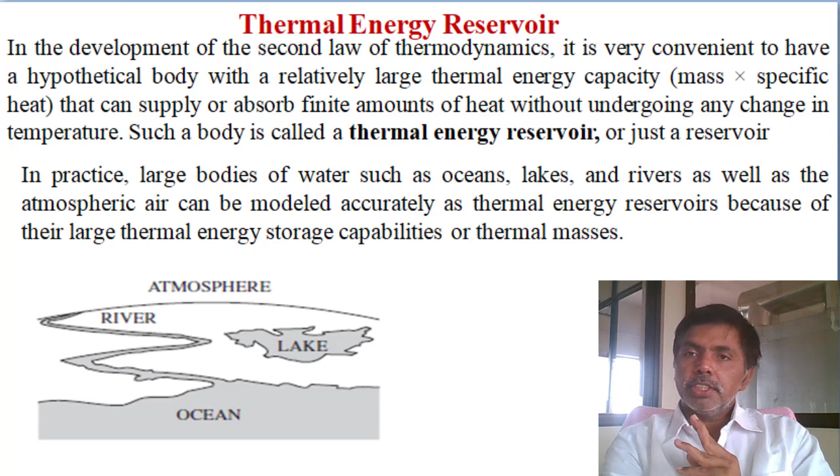So, how will it fit? What is the necessity? It is for achievement of external reversibility. This hypothetical assumption is for achievement of external reversibility and simplification of the problem only, no doubt at all. Any examples we can discuss? The first example: we are dumping so much heat, household heat, residential building heat in winter, but the ambient temperature is not changing. So the ambient condition we can call a reservoir.

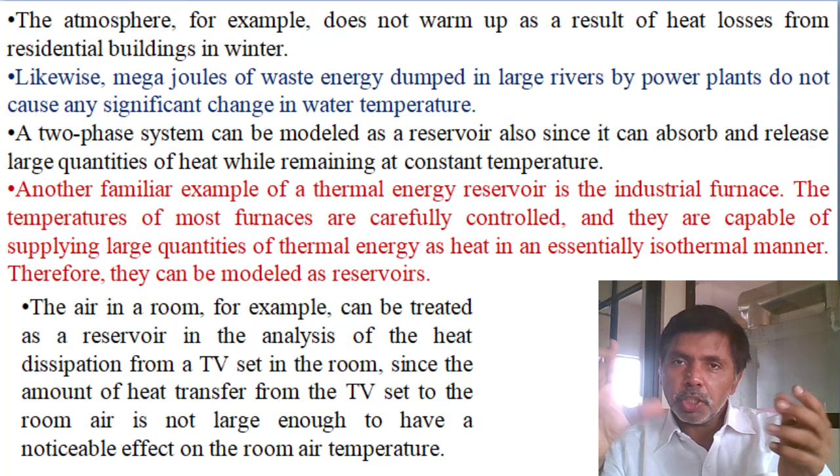Or waste energy from the industries, because it is dumped to the rivers. In condensers, cooling towers are used. There also the temperature is not changing. Or when you switch on the TV, electronic goods, if you move to the nearer area, you feel hot. But overall, the room ambient temperature is not increased by the TV. So continuously we are dumping waste energy to the atmosphere, and the atmosphere temperature is not changing. So the atmosphere we call a thermal energy reservoir. We continuously reject heat, but the temperature is not changing.

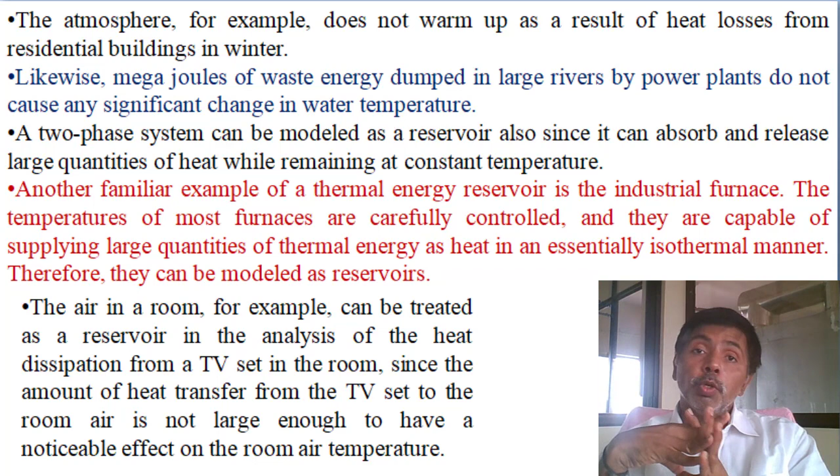And second, in a positive way, the furnace. For different purposes we are using furnaces. In all furnaces we maintain a constant temperature. It may be 900 degrees, 1000 degrees, whatever it may be. Constant temperature continuously. It is also called a reservoir. So I have given two examples: one is high temperature, the second one is low temperature. Reservoir means an infinite amount of heat quantity. Whenever we are adding or removing, it is not changing. It's called a thermal energy reservoir.

Source means a reservoir continuously giving heat, or from which we continuously extract heat. Source: the furnace I mentioned. Or solar energy: continuously at 5500 degrees Kelvin it is rejecting heat, continuously giving that high temperature to the earth as electromagnetic radiation. So we can take solar as an example also; at constant temperature it is continuously given.

Coming to the sink: it means continuously absorbing heat, or we are continuously rejecting heat to the reservoir and the temperature is not changing; it's called a sink. Best examples are the atmosphere, rivers, sea. Wherever we dump waste heat, the overall temperature of the system is not changing. Okay, so a thermal energy reservoir means infinite value. However much you extract, the temperature is not changing. Continuously giving is called a source; continuously absorbing is called a sink.

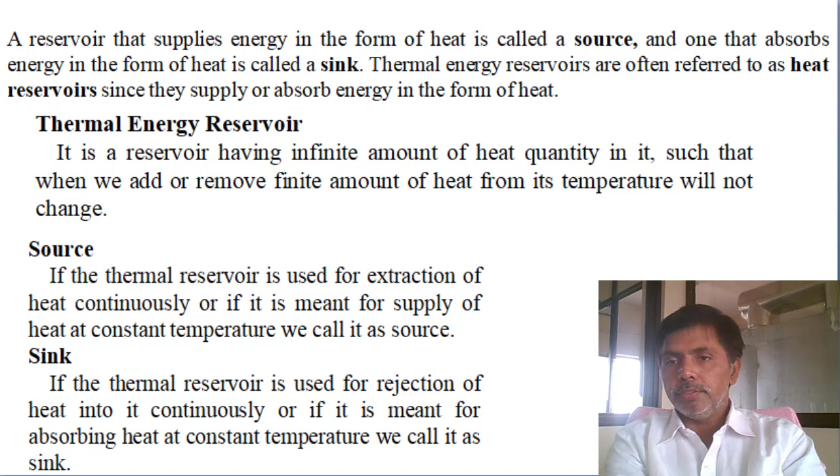Okay, now we will move to the engine. What is an engine? The word engine we use everywhere. Generally, an engine is an energy conversion device.

One form of energy is converted to another form. It is not generating, just converting one form of energy to another. Then what is a heat engine? A wind turbine you can call an engine, or a hydel turbine we can call an engine. It is converting one form to another form. Any type of engine converts a form of energy, then we call it an engine.

But coming to the heat engine, it is a special device. First it is converting chemical energy to heat. By utilizing that heat, it is producing mechanical work. Mechanical work from a thermodynamic point of view is not force into distance. It is rotation; shaft rotation we are getting.

Then that rotating shaft is connected to the driving pulley. It will pull the vehicle, or it is connected to the generator and will generate electrical energy. So rotation of the shaft is mechanical work output. So a heat engine is a special device which converts chemical energy to thermal energy, utilizing that thermal energy for production of mechanical work. It is a special engine operating in two stages, so it has some special characters compared to other ones.

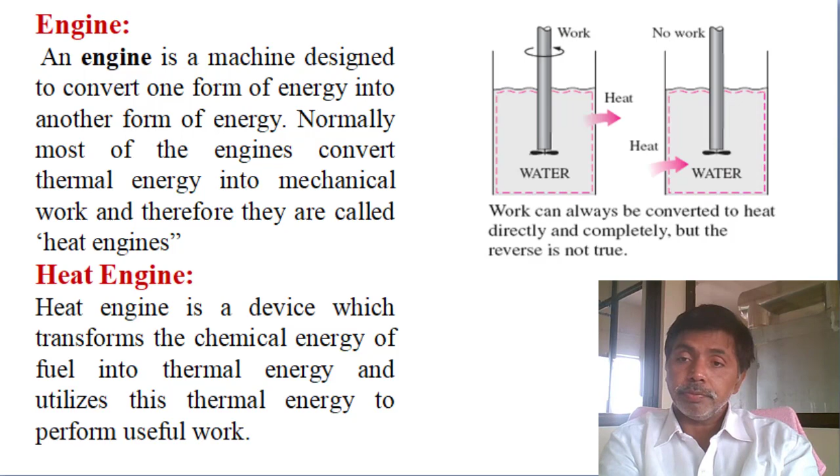A heat engine has four special characters. One, it must extract heat continuously from the source. You can see it is continuously extracting heat from the source and converting part of the heat to work. Second characteristic, converting part of the heat to work. Third one, reject the remaining heat to the surrounding or sink, meaning the low temperature reservoir.

And the fourth one, the main important one, it must operate on a cycle only. If it is not operating on a cycle, it cannot convert chemical energy to mechanical energy. So these 4 points are important. Next, for cyclic operation, whatever medium or fluid we are using is called the working fluid. I will explain one heat engine.

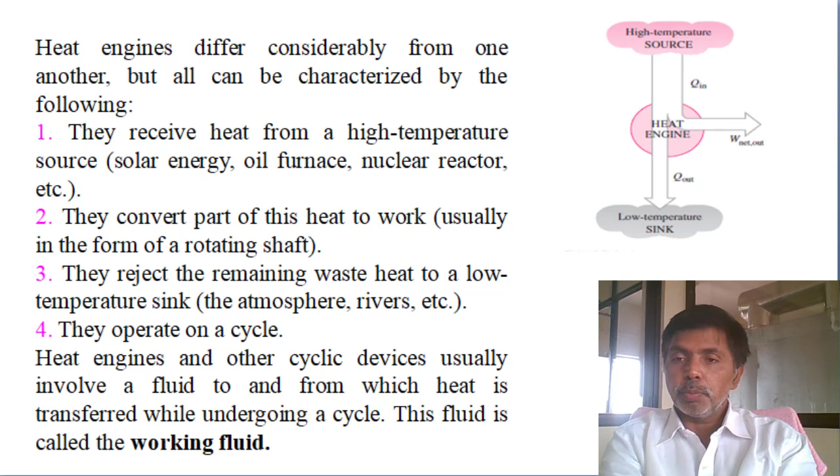"Explain a heat engine" is a question you can expect in an end exam. So don't just write the characteristics; select any heat engine. Heat engines are different. It may be an internal combustion engine, as in our two-wheelers. It may be an external combustion engine, especially for power generation. So there are two types of heat engines, but the working principle is the same.

The characters are the same. It must extract heat from the high temperature source. Part of the heat is converted into work. The remaining heat is rejected to the sink, and it must operate on a cycle. This operation is not changing. So for easy, simple explanation, I selected a steam power plant as the heat engine. It contains pump, boiler, turbine and condenser, four components.

Adiabatic compression by pump, constant pressure heat addition, adiabatic expansion, constant pressure heat rejection. These are the four processes. You can see what the pump is doing: it pumps the liquid from condenser pressure to boiler pressure. Then this liquid enters the boiler and, by absorbing heat, converts into steam.

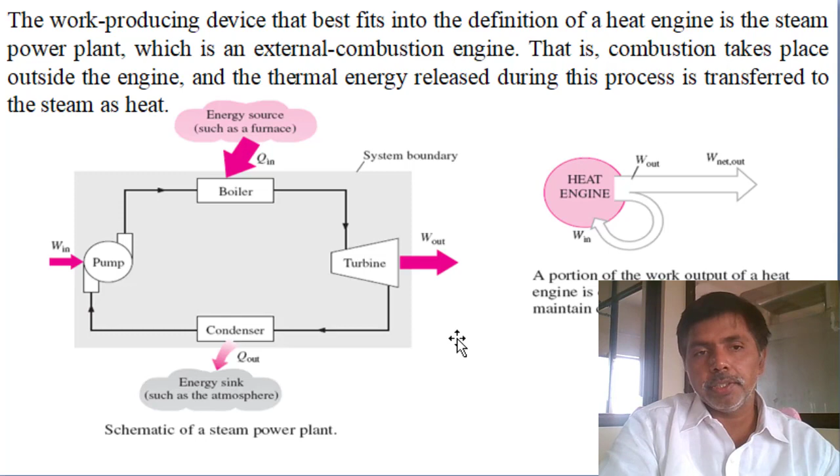Now what is the thermal efficiency? Thermal efficiency means we are supplying heat; how much fraction of heat is converted as work, that's all. Output by input. My target, thermodynamics, the title itself, heat to power. So how much fraction of heat is converted as work we want to calculate.

So thermal efficiency, suffix TH. Net work done by heat supplied means how effectively the amount of heat supplied to an engine is converted into work. It is important.

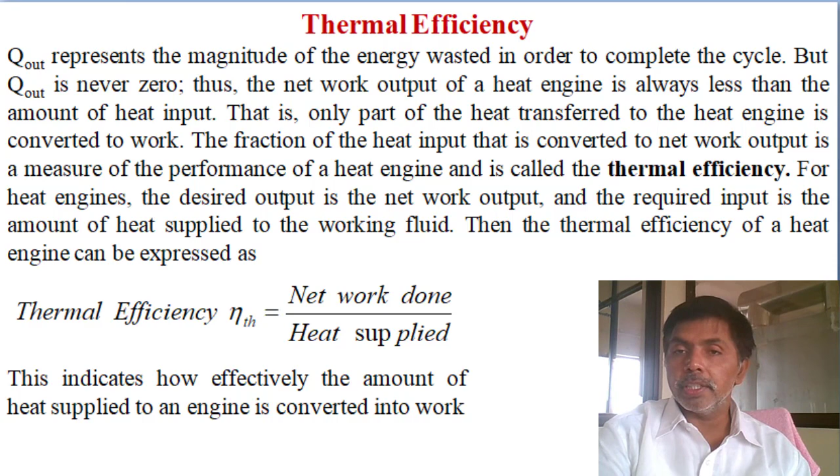Okay, what is the beauty? Why did we discuss this? Why did we select only the steam power plant? So many power cycles are there, heat engines are there, but I took the example of only the steam power plant. Why? Because you can see this is the Indian electrical energy generation scenario. More than 231 gigawatt electrical energy is generated by this cycle, the Rankine cycle.

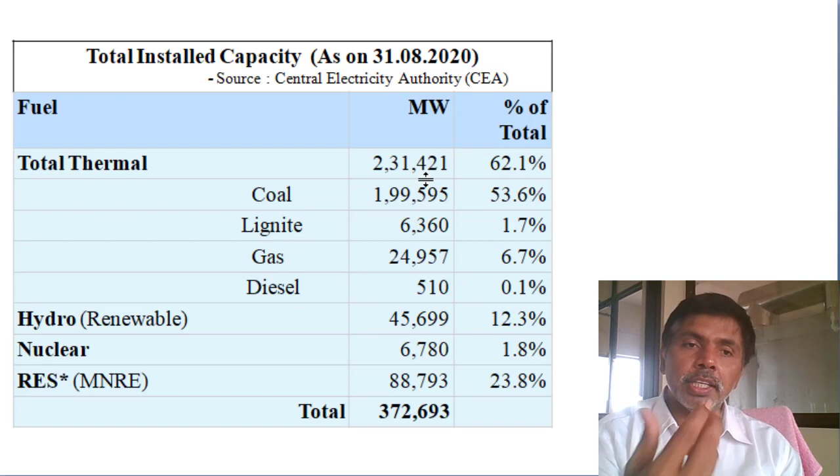So the majority, 62% of the electrical energy, is generated just based on the Rankine cycle. So it is useful for us. That's why I directly took the example of steam power plants.

Next, what is the Kelvin-Planck statement? Suppose we are creating a temperature difference. Automatically heat flows from high temperature to low temperature. This is a natural phenomenon. We don't want to spend any energy. Once heat is flowing from high temperature to low temperature, in between I place one heat engine, any engine. It will convert part of the heat to work and the remaining is lost to the sink.

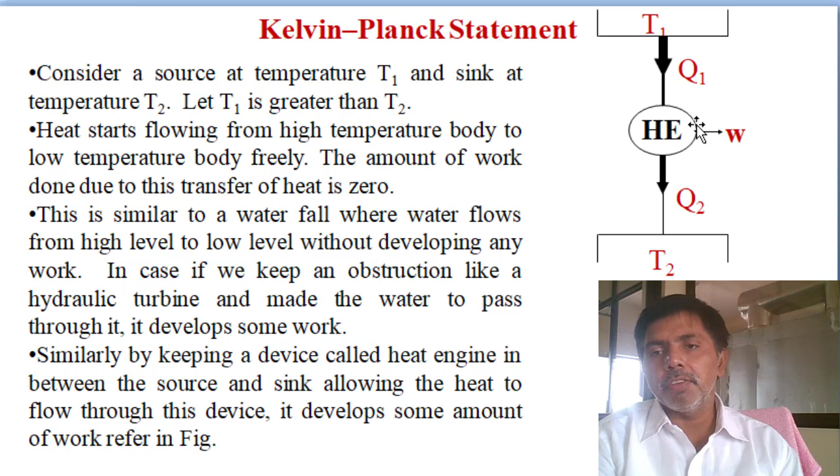If we maintain a temperature difference, only then will heat flow from the high temperature reservoir to the low temperature reservoir. While heat is flowing, if I place any engine in between, part of the heat will convert to work. What is the Kelvin-Planck statement? Then coming to the efficiency: net work done by heat supplied. Net work done is heat supply minus heat rejection, Q1 minus Q2, by Q1.

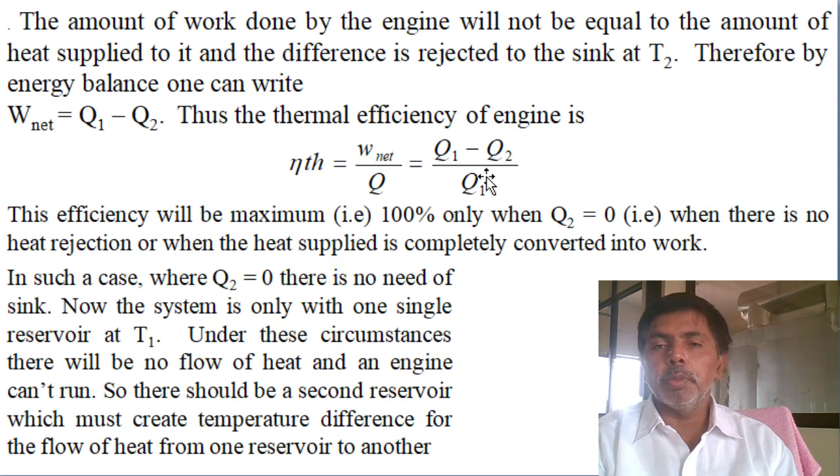Suppose, when will we get 100% efficiency? When heat rejection is 0. Okay, Q2 is 0, then we get Q1 by Q1, then we get 100% efficiency. Then we reconstruct the heat engine. Q2 is 0, efficiency is 100%. So the heat engine is continuously extracting heat Q1 and converting that entire Q1 into work.

But I already mentioned, for the flow of heat, temperature difference is important. If we have not created a temperature difference, how will heat transfer, heat flow take place? If heat flow itself is not taking place, then how will the engine convert heat to work? Because heat is not transferring from one place to another. It is like reservoirs: in the reservoir there is no water, but we have a turbine. What will we do? If heat is there but we have not created a temperature difference, how will heat flow take place?

So what Kelvin-Planck says: it is impossible to construct a reversible cycle engine which produces work continuously by exchanging heat with a single fixed temperature reservoir. So with a single reservoir, construction of a heat engine is practically not feasible. This is Kelvin-Planck. Is it true? Yes. We cannot construct it because heat flow is not taking place. How will it convert heat to work?

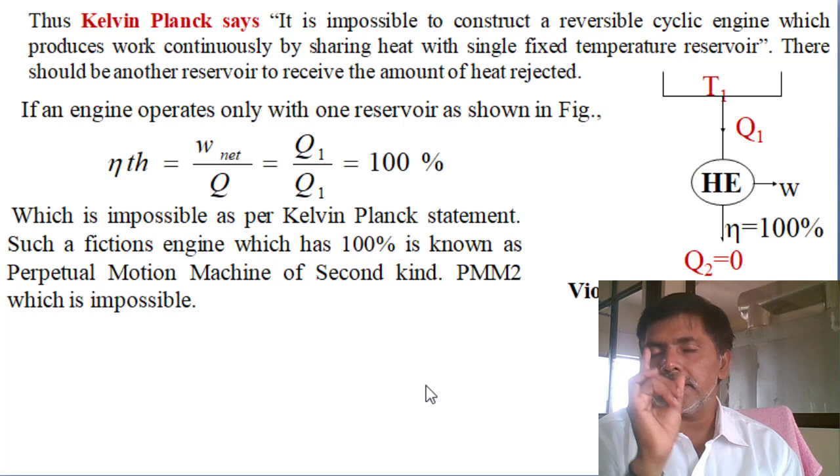So this is the second law of thermodynamics. First statement: it is impossible to construct a reversible cycle engine which produces work continuously by exchanging heat with a single reservoir.

Then efficiency, you can see, is 1 minus Q2 by Q1, and Q is directly proportional to temperature. Instead of Q, you can substitute T. So only if T2 is 0 will we get 100% efficiency. So in another form we can say the Kelvin-Planck statement: a 100% efficiency heat engine is practically not feasible. Or single reservoir heat engine construction is practically not feasible.

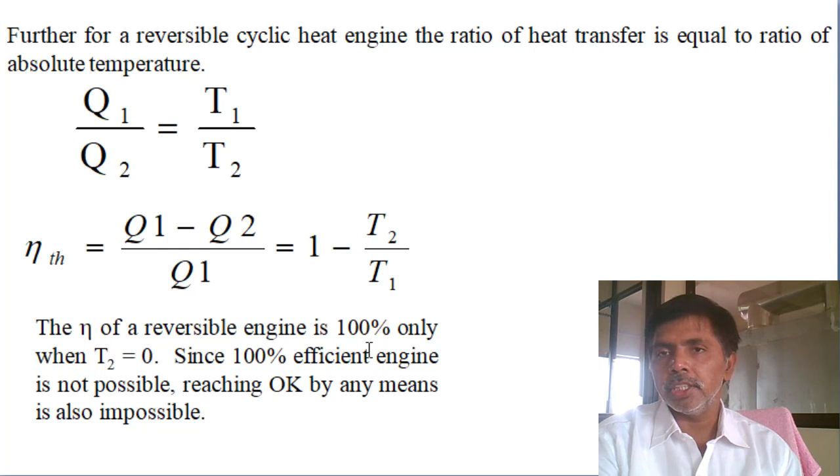Okay. I think with this I will conclude today's lecture. Tomorrow we will discuss the heat pump and the Clausius statement.